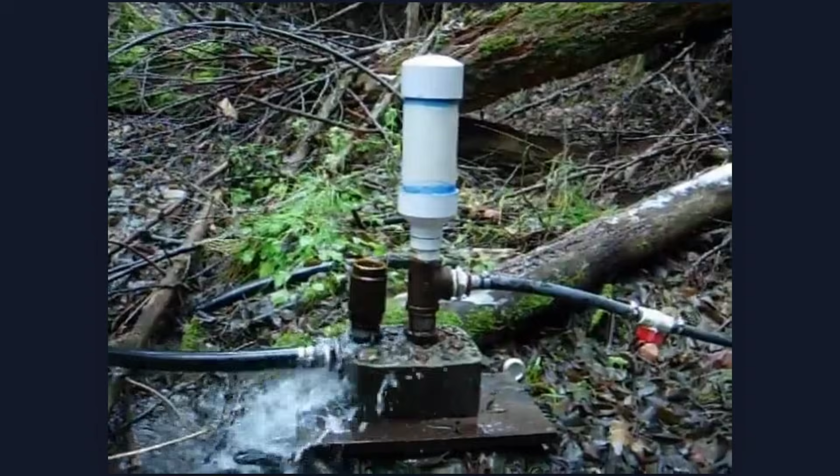250 years later, the device is still deployed. In the Philippines alone, more than 595 systems serve nearly 300,000 people daily. Researchers at Delft propose using it for energy recovery in modern water distribution. And yet, no American building code has ever created a pathway for it. No standard engineering specification lists it. The global pumps market runs on motors and electricity, and this machine asks for neither.

It is called a hydraulic ram pump. This is not a story about a machine that failed. This is a story about a machine that was standardized into invisibility.

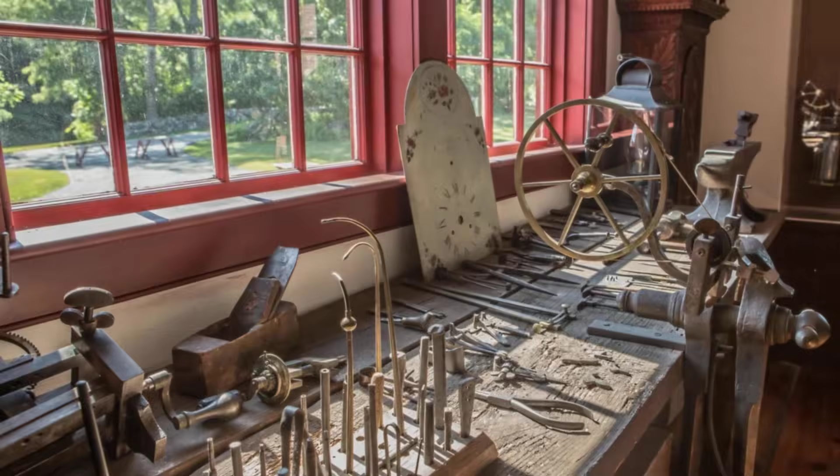Welcome to Forbidden Manual. The archive opens in 1775 in the pages of the Royal Society's Philosophical Transactions, the same journal that published Newton, Hooke, and Franklin. The paper is written by a clockmaker named John Whitehurst, and it describes something that should not work.

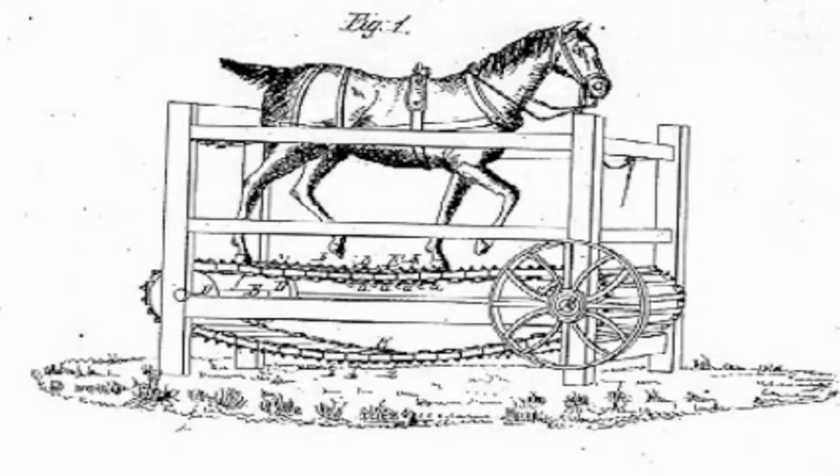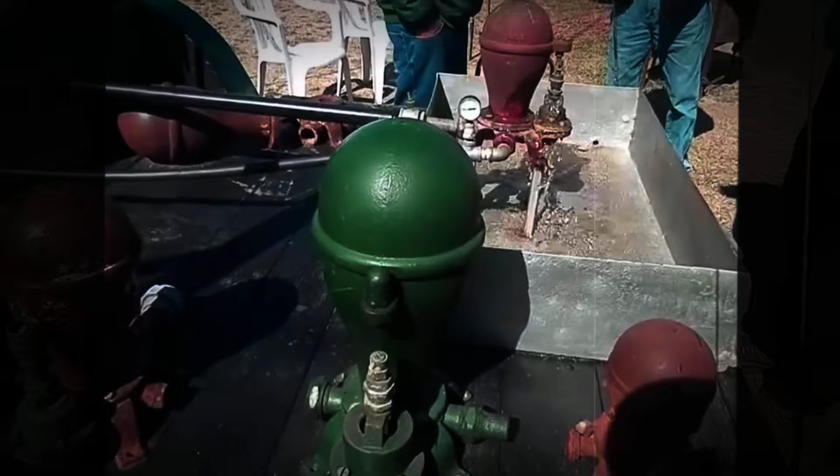3 years earlier, on the estate of Philip Egerton at Oulton in Cheshire, Whitehurst had built a machine. It raised water from a lower source to a higher destination, to the brew house and the estate offices, without a horse, without a windmill, without a steam engine. Whitehurst's explanation was precise. The water rose, he wrote, by its own momentum, not by external force, by momentum already present in the falling stream.

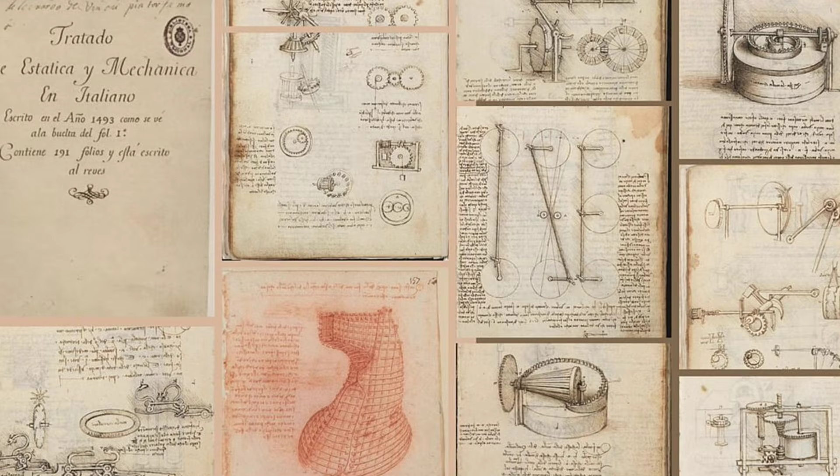The machine worked, it kept working, and in 1775, Whitehurst presented his findings to the most rigorous scientific body in the English-speaking world. This was not folklore. This was peer-reviewed physics 250 years ago.

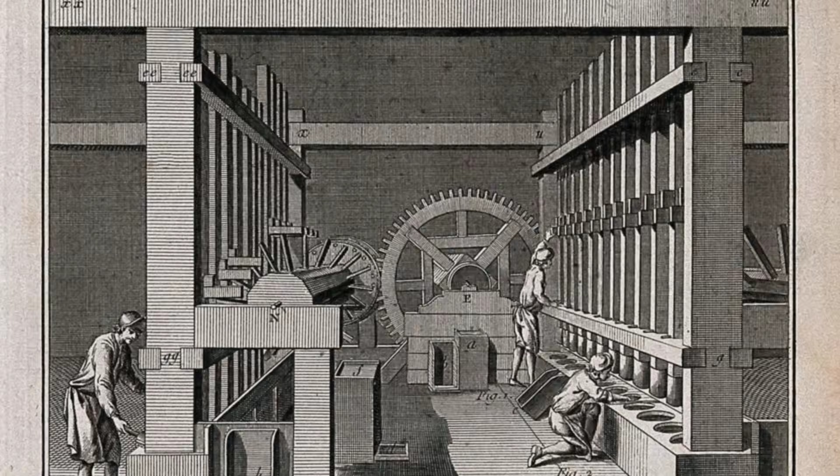In the town of Voiron in southeastern France, a paper mill owner faced a familiar problem. Water needed to reach a height the stream could not. The mill owner's name was Joseph Michel Montgolfier. You may know him for something else. 13 years earlier, he and his brother had launched the first successful hot air balloon. Now, Montgolfier turned his attention downward to falling water and the energy it carried.

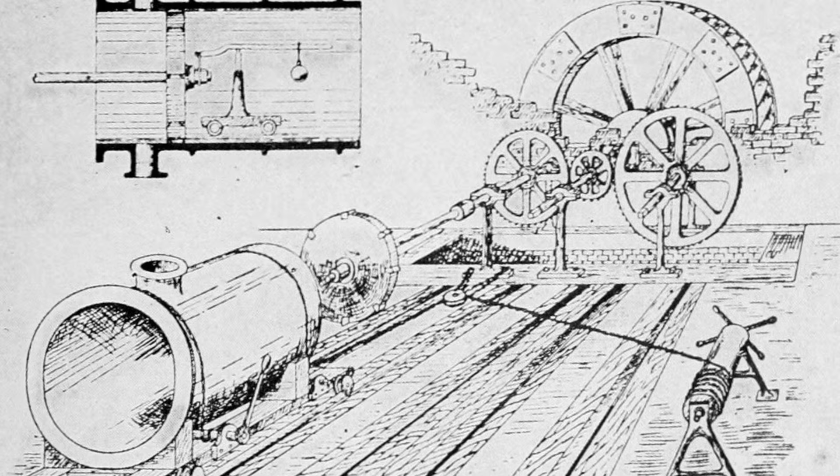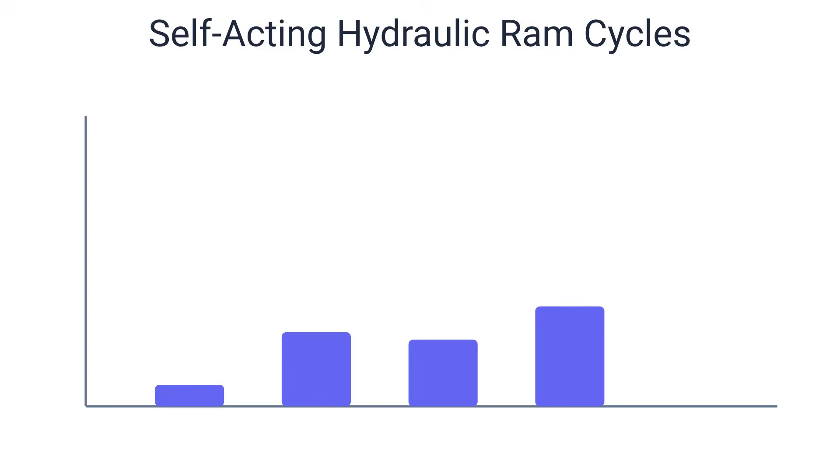He invented the self-acting hydraulic ram. The machine ran itself. No hand on the valve, no timing required. Water fell, pressure built, a valve slammed shut, and a smaller stream shot upward. The cycle repeated, 30 times a minute, 60, 100. The stream became the engine. No wire, no motor, no bill.

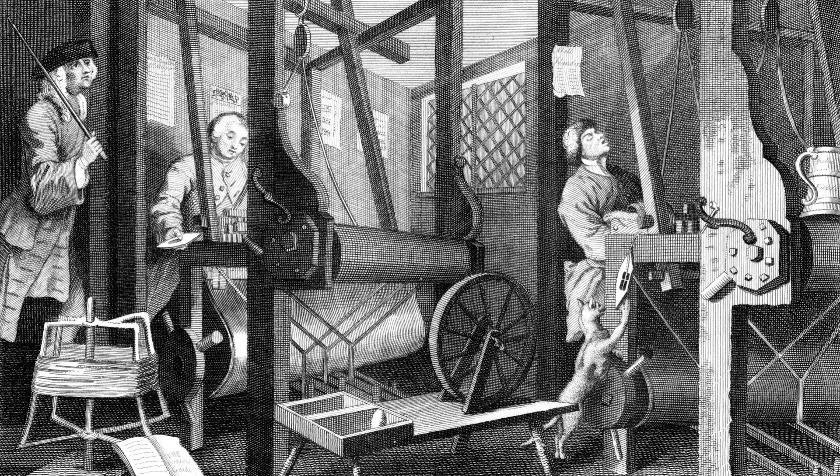Word traveled fast. By December of 1797, Matthew Boulton, one of the most powerful industrialists in Britain, partner to James Watt, builder of steam engines, had filed British patent 2207 on Montgolfier's behalf for an apparatus for raising water and other fluids. Consider the irony. One of the fathers of industrial machinery helped formalize a device whose greatest selling point was that it required no industrial inputs at all. And then the machine crossed the Atlantic.

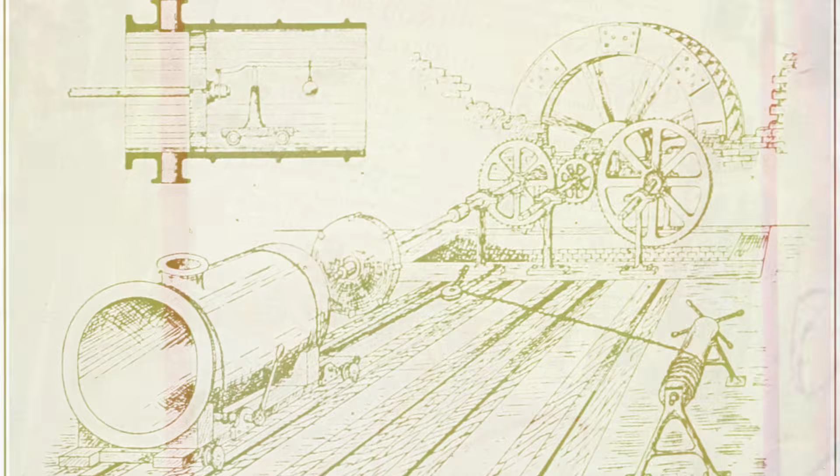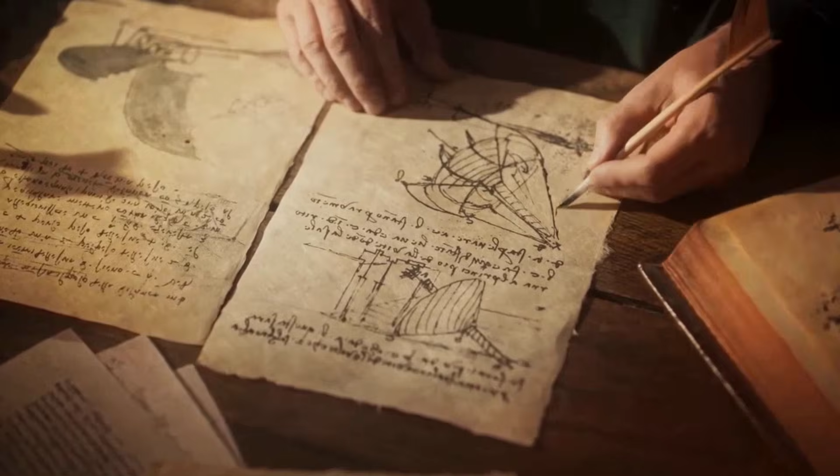In 1798, the Portsmouth Aqueduct in New Hampshire installed a hydraulic ram. The local description was not modest. They called it the perpetual pump, capable of lifting a barrel of water every minute. Perpetual. That was the word they chose, not perpetual motion. Engineers in 1798 knew better than to claim that. Perpetual operation, a machine that ran without rest, without fuel, without human labor, as long as the stream kept flowing. The valve slams shut. Pressure explodes, water climbs.

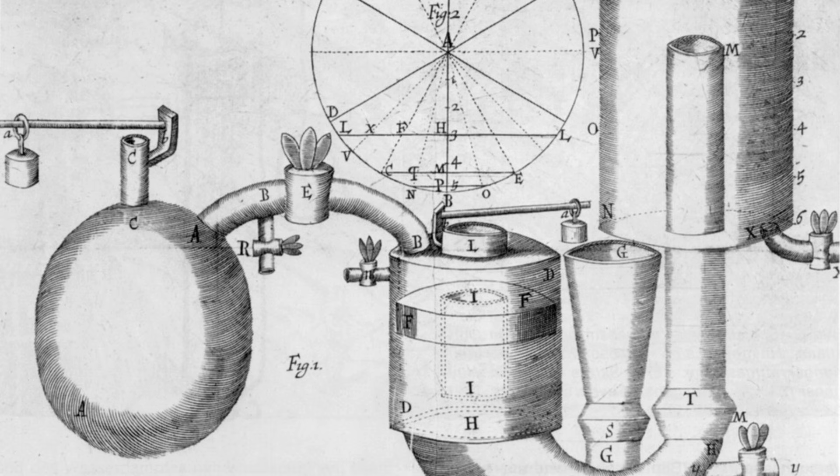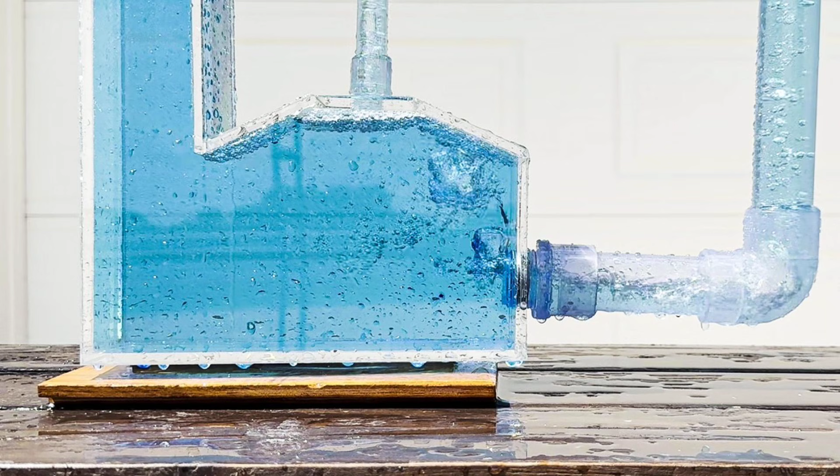By the end of the 18th century, the hydraulic ram had earned a British patent, a Royal Society publication, and an American installation that called it perpetual without embarrassment. The physics was proven, the elegance was undeniable, more than 2 centuries old, still working today. What happened next was not a failure of engineering.

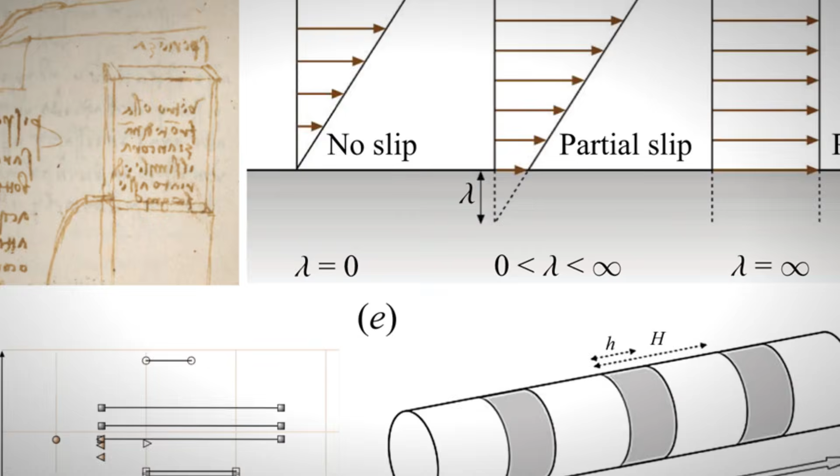In 1975, an engineer named H.W. Iverson published a paper in the Journal of Fluids Engineering, the flagship publication of the American Society of Mechanical Engineers. The paper was titled An Analysis of the Hydraulic Ram. By then, the device was nearly 200 years old, and engineers were still writing peer-reviewed analyses of how to optimize it. Iverson was not alone.

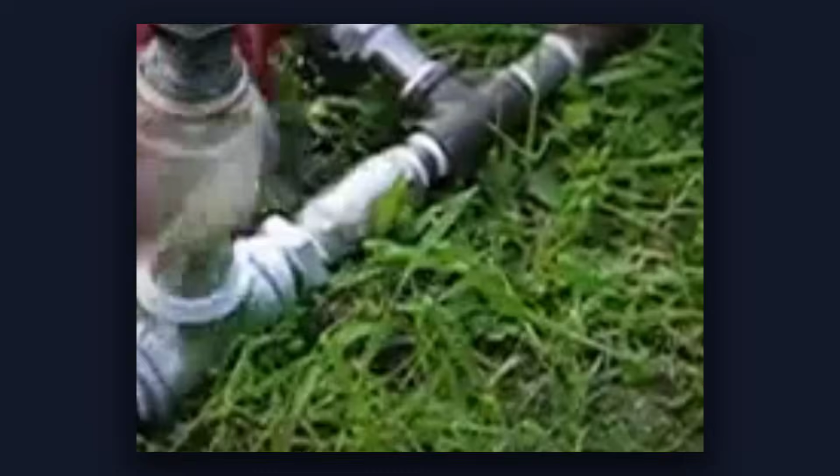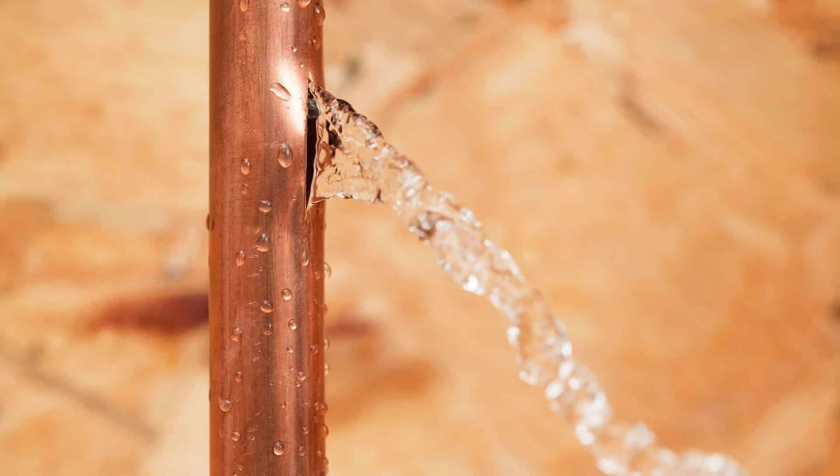In 2018, Chin Han Chuan at Universiti Sains Malaysia ran experiments varying supply head, delivery head, and air vessel geometry. The same year, Nikita Mishra and colleagues published data showing that impulse valve beat frequency, the rhythm of the machine, could shift efficiency dramatically. Increasing beat frequency from 65 to 76 cycles per minute changed everything. More water wasted, less water delivered. The machine looks crude. It is exquisitely sensitive.

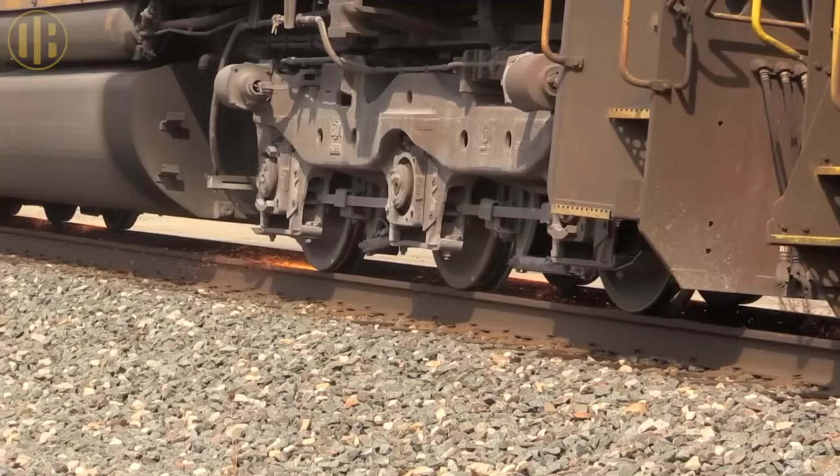So how does it work? Think of a freight train. A loaded freight train moving at speed carries enormous momentum. The faster it moves, the harder it is to stop.

And if you stop it suddenly, if you throw a barrier across the tracks, the energy does not vanish. It transfers. It crashes. A hydraulic ram harnesses that crash. Here is what happens in real time.

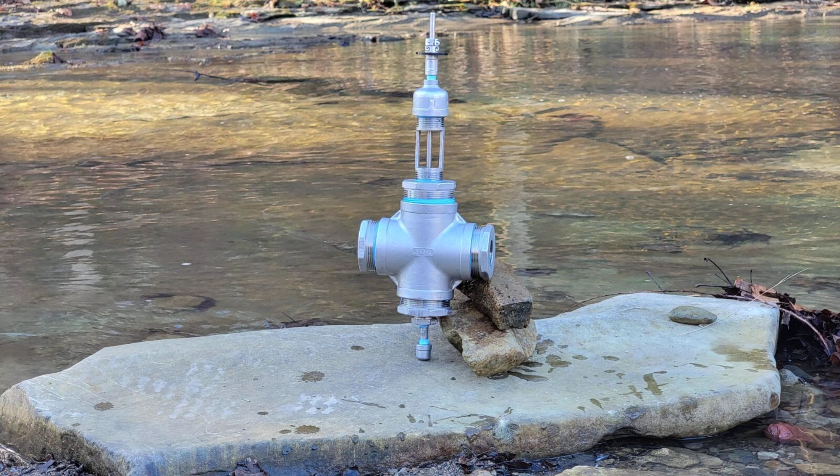A rigid pipe, the drive pipe, fills with moving water from a stream or spring. The water accelerates downhill. At the bottom, an impulse valve sits open, letting water spill freely. The flow builds speed. The instant the flow reaches a critical velocity, the valve slams shut. The moving column has nowhere to go.

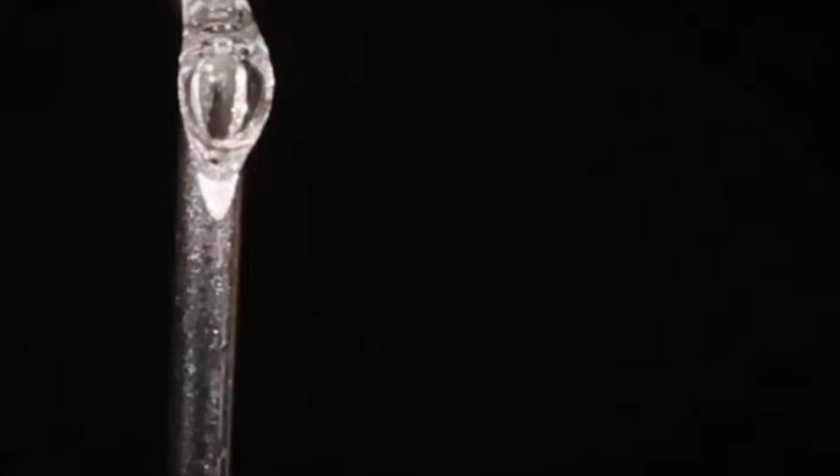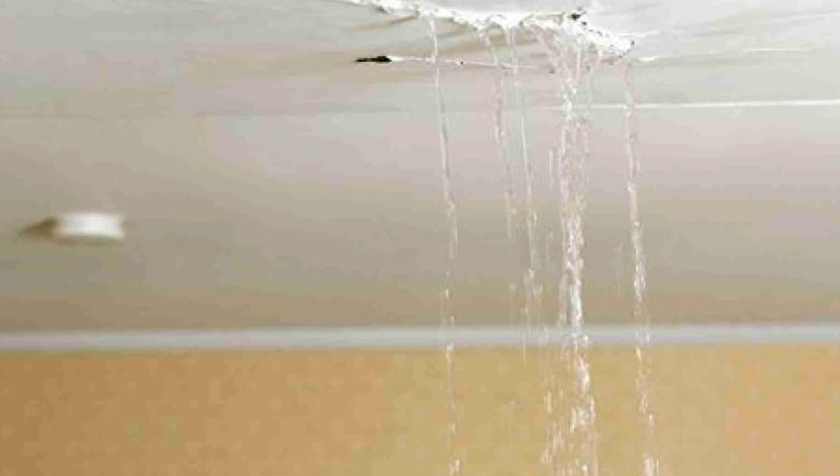Water is nearly incompressible. The momentum of that column converts instantly into a pressure spike, a shock wave called water hammer. The same phenomenon that makes pipes bang in old buildings. The same physics that can rupture poorly designed plumbing. But in the ram pump, that shock wave has a destination.

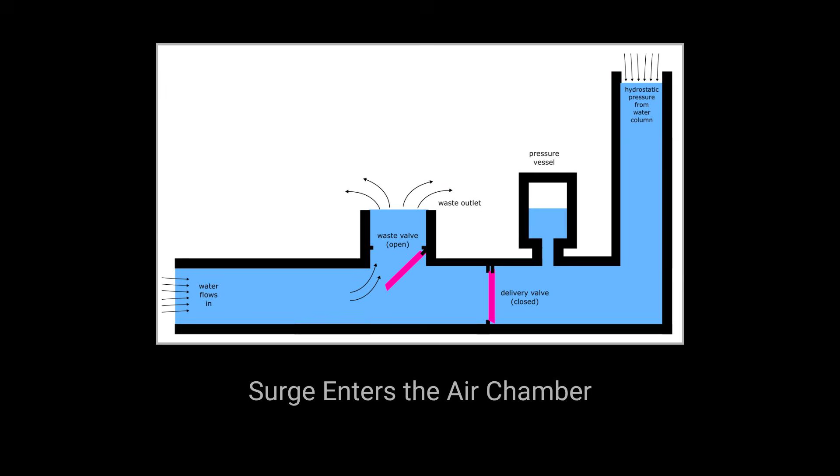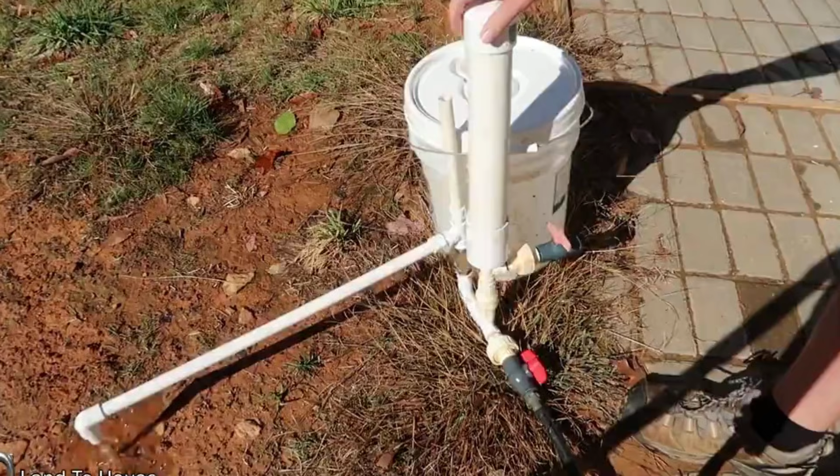The pressure spike forces open a second valve, the delivery check valve, and pushes a small volume of water into an air chamber. The air compresses, absorbs the shock, and then pushes that water up the delivery pipe, uphill, higher than it fell. The impulse valve falls open again. The cycle restarts, 30 to 100 times per minute. No switch, no motor, no external input. 2 moving parts, that is all.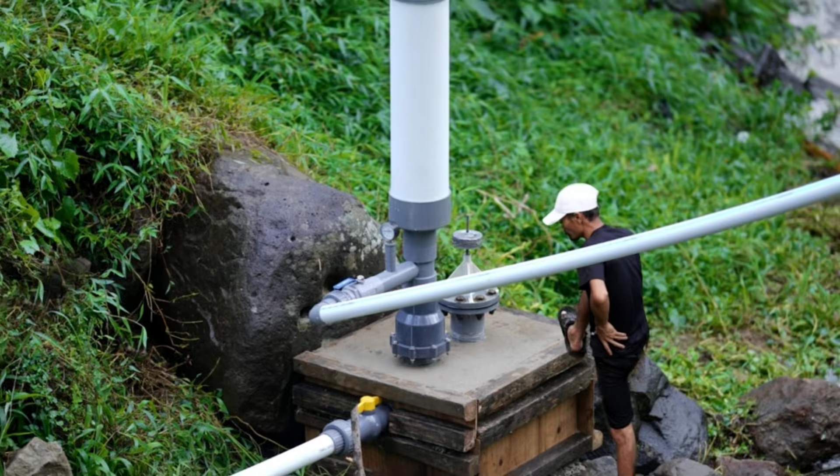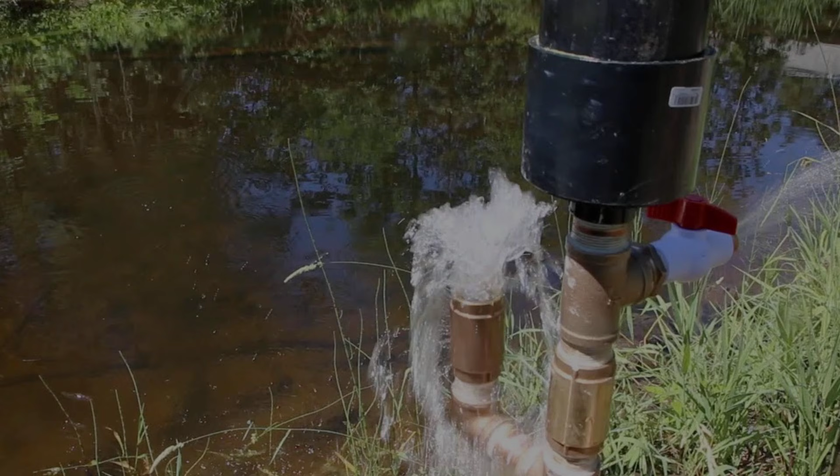The numbers seem impossible. Practical Action, a British engineering charity with decades of field experience, reports that under favorable conditions, more than 50% of the energy in the driving flow can be transferred to the delivery flow. Not 50% of the water. Most of the water spills out the waste valve. 50% of the energy. The machine sacrifices volume to gain height. A larger flow falling through a small drop lifts a smaller flow through a much larger rise.

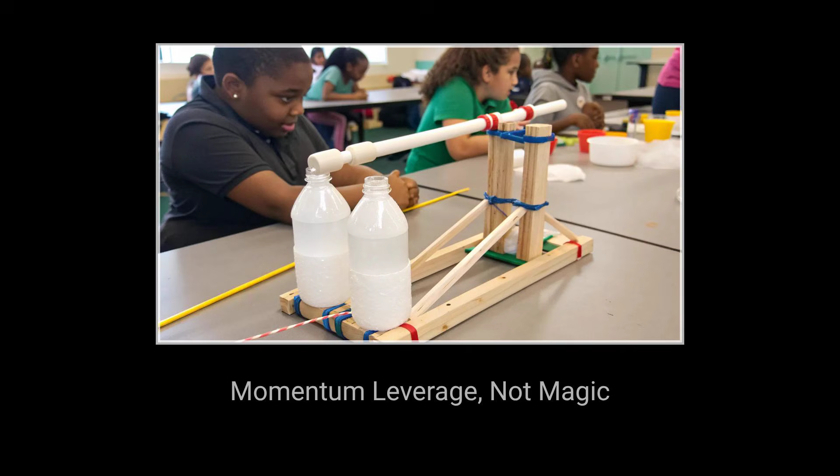The physics is not magic, it is leverage. It is momentum, redirected. The stream is the engine, the crash is the mechanism, the air chamber is the cushion, and the delivery pipe carries water uphill, without electricity, without fuel, without a monthly invoice, as long as the source keeps flowing. A pump that needs no power, a system that creates no bill, engineering that asks for nothing except falling water and patience. That was its triumph, and that was its problem.

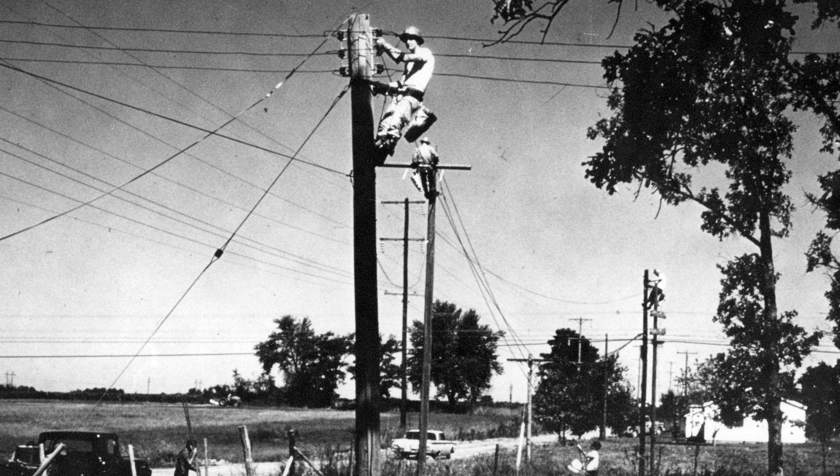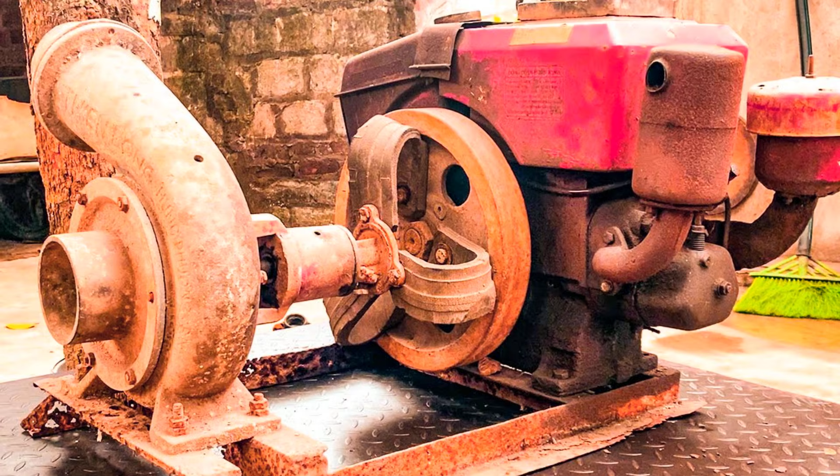When electricity reached the American farm, everything changed. The Smithsonian documents rural electrification as one of the most transformative shifts in agricultural history. Electric power brought light to farmhouses that had known only kerosene. It brought refrigeration to dairies that had relied on ice cellars. And it brought a new kind of pump, motorized, controllable, instant.

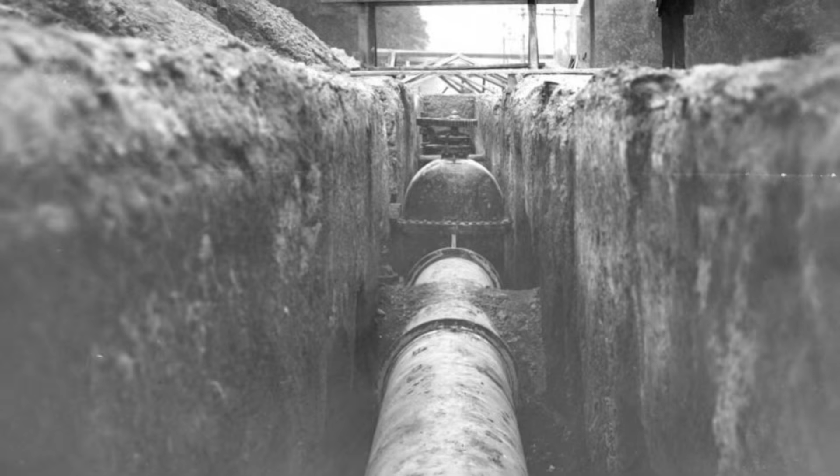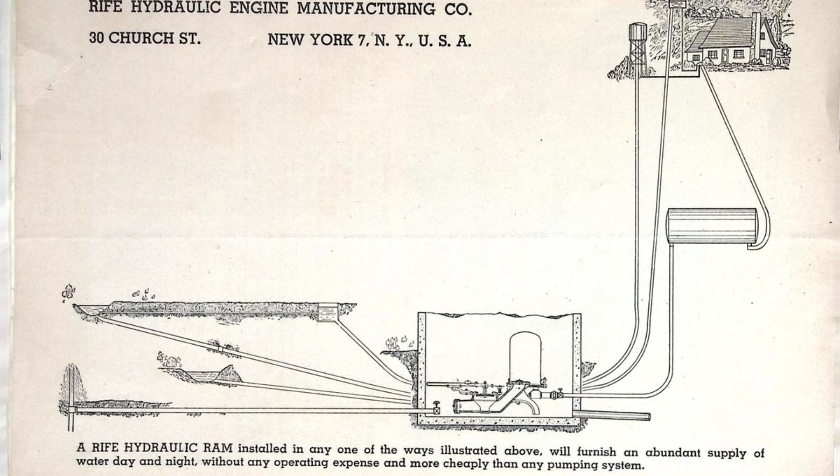The electric pump had a plug. It had a breaker, it had a bill. It fit into a system that could be metered, serviced, and sold. The hydraulic ram had none of these. It asked for nothing. It generated no recurring revenue. It required no technician, no replacement parts, no annual inspection. Once installed, it simply ran on physics that predated the grid and would outlast it. That made it invisible to the infrastructure being built.

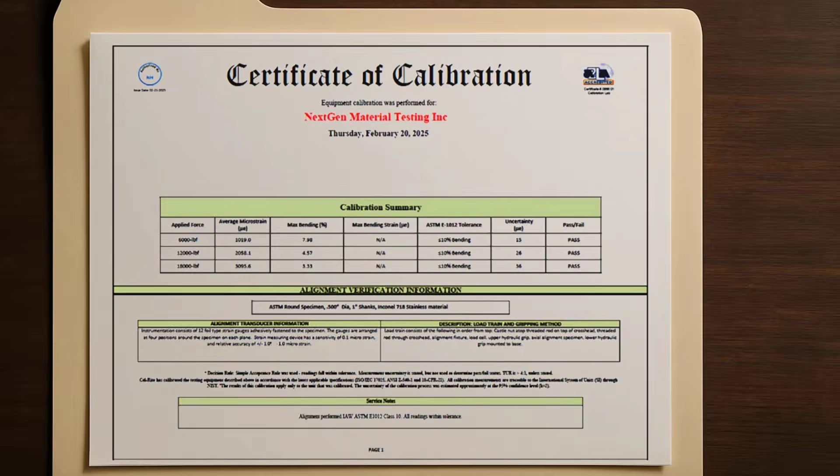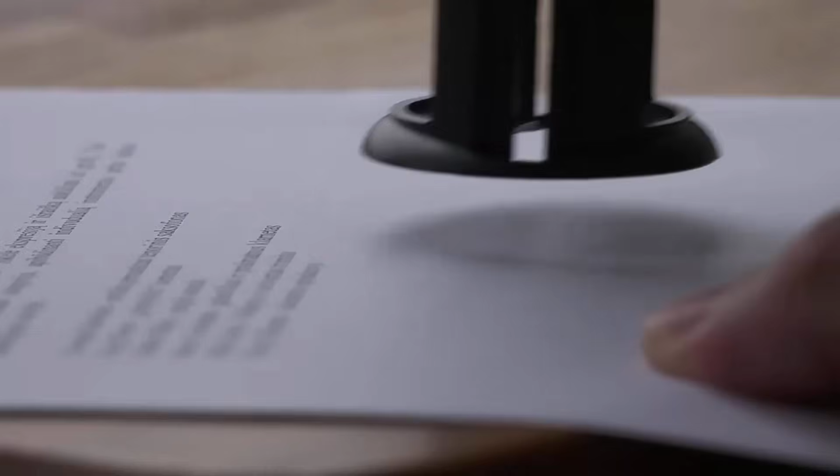Today, according to industry estimates from Mordor Intelligence, electric motor-driven pumps account for approximately 75% of the global pumps market. The hydraulic ram does not appear in procurement catalogs. It does not appear on standard bid sheets. It does not appear in the engineering specifications that contractors pull from software libraries. It is not banned, it is simply not listed. But the absence goes deeper than catalogs.

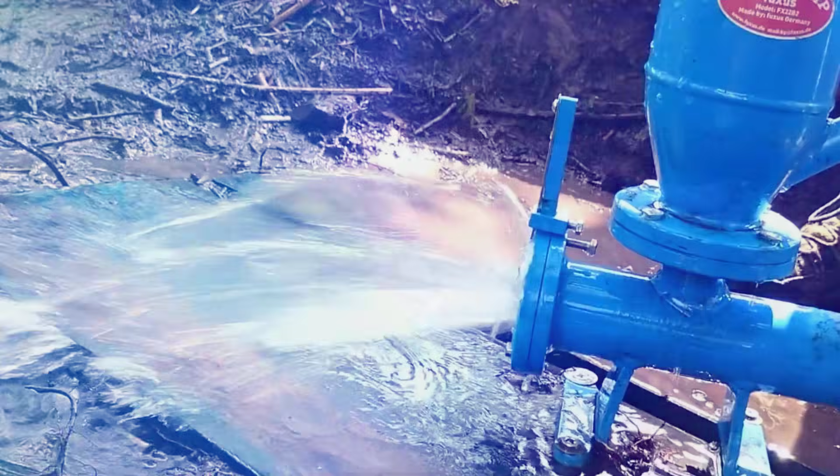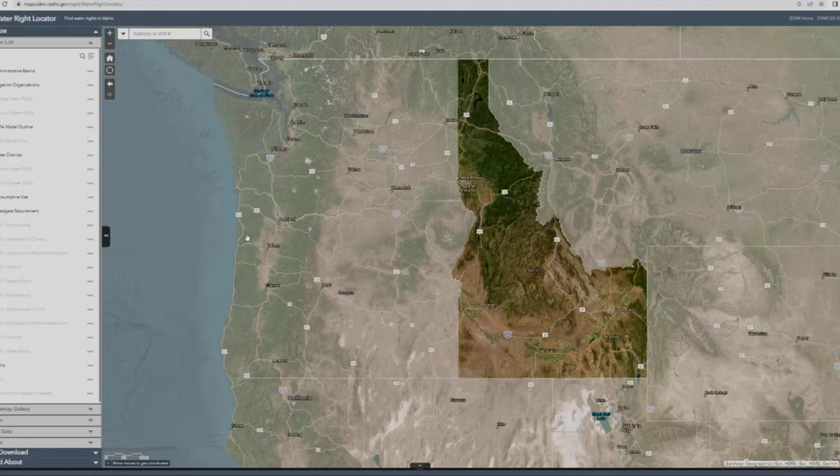If you find a spring on your property, a spring that flows year-round, that drops 12 feet to your garden, you might read about the hydraulic ram. 2 moving parts, no electricity, runs indefinitely. You might think, this is the answer. Then you call the county. The first question, do you have a water right? California's State Water Board is explicit. You should not assume that an existing diversion pipe or facility gives you a legal right to divert. Post-1914 appropriative diversions generally require permitting and licensing.

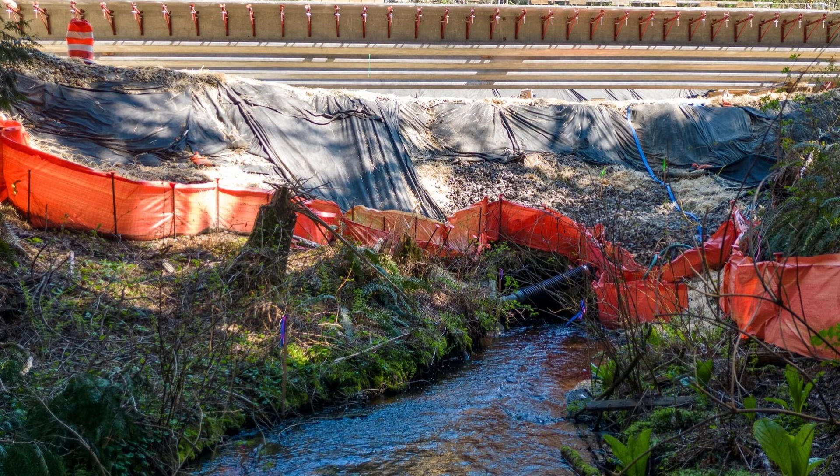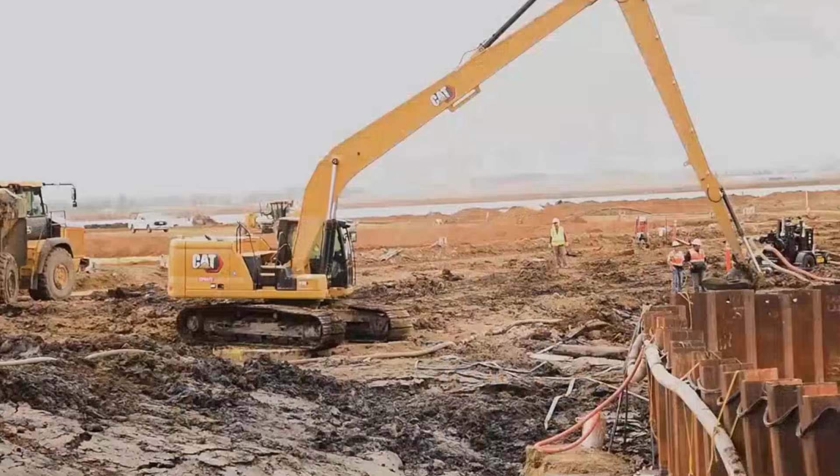The second question, does your diversion require a hydraulic project permit? Washington's Code WAC 220-660-010 states that anyone who wants to use, divert, obstruct, or change the natural flow or bed of fresh or salt waters generally needs a hydraulic project approval. The third question, are you connecting this to potable plumbing? Washington's Plumbing Code WAC 51-56-0600 requires backflow protection for potable supplies serving irrigation systems. Annual testing, approved assemblies. The fourth question, who is your licensed installer? The spring has not changed, the physics has not changed, only the paperwork has.

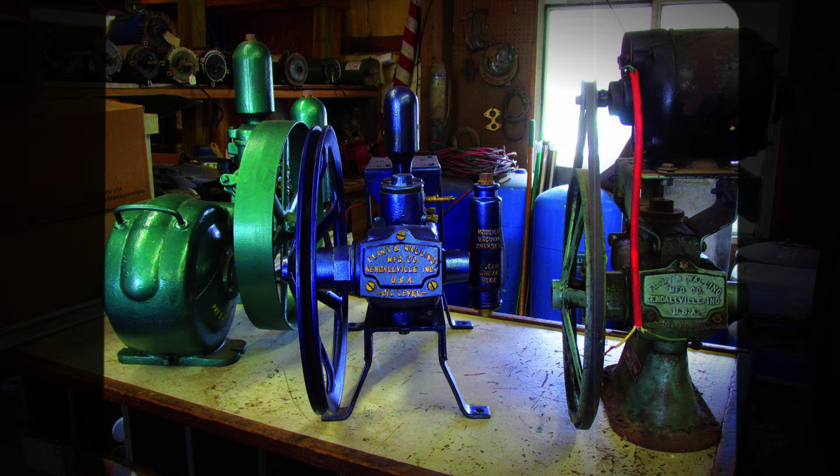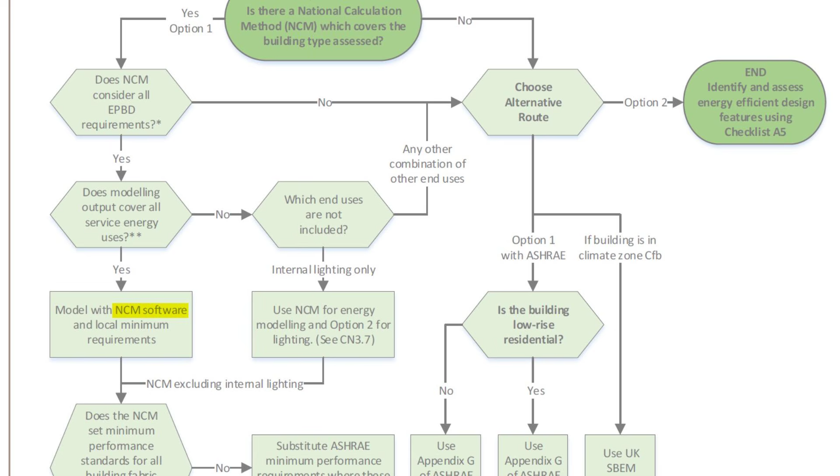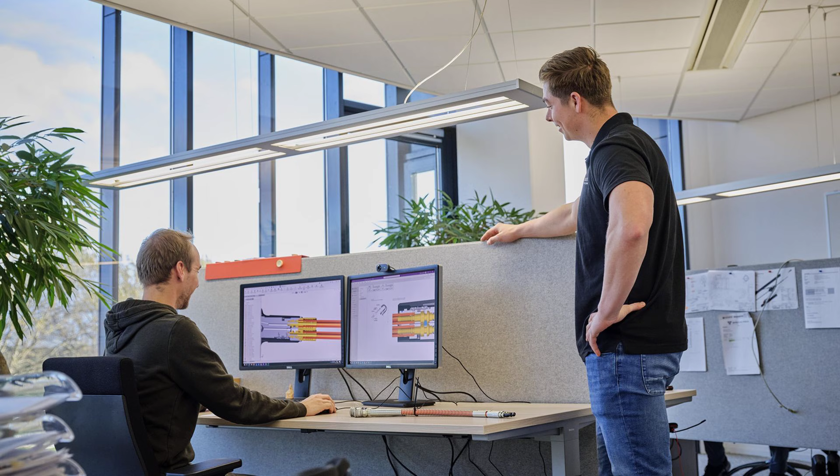They electrified the farm and made the motor pump the default answer. They wrote rules for cross connections, potable protection, and permitted diversions, rules that assume equipment with serial numbers and power inputs. They subsidized electric infrastructure and made the motor pump easy to finance, easy to permit, easy to specify on a bid sheet. They built a procurement system that cannot see a machine with no manufacturer's warranty and no wiring diagram. They created licensing structures with no category for a device that has two moving parts and no electricity. They did not need to ban the hydraulic ram. They only needed to make the conventional path easier.

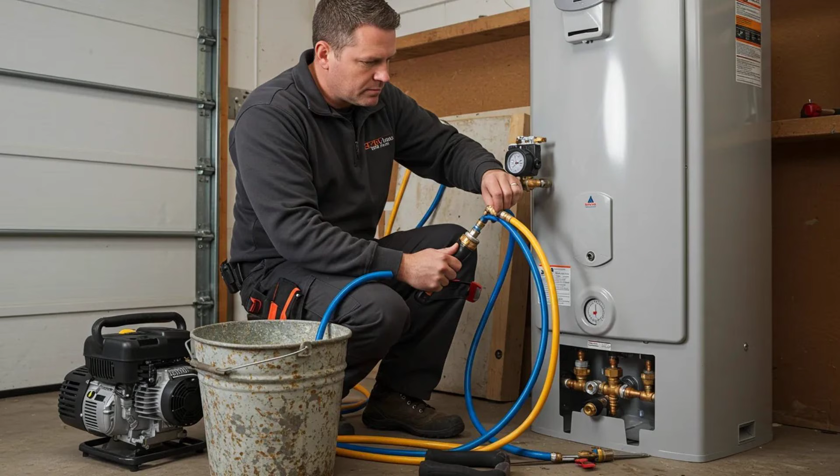No regulator sits in an office scheming to suppress the ram pump. The conspiracy theory is the wrong frame. The truth is structural. The codes, the permits, the appraisal categories, the bid specifications, they were all designed around equipment that plugs in, equipment that can be inspected, equipment that fits a category. The hydraulic ram fits no category. And what fits no category finds no pathway.

You cannot meter the stream. You cannot sell the shockwave. You cannot build a subscription around physics that asks for nothing. The machine solved the wrong business problem. It works where there is flowing water, a drop, and patience. It does not create dependency. It does not generate demand. That is not conspiracy. That is economics. And economics writes the codes, but the machine never disappeared. It simply moved to places where the grid could not follow.

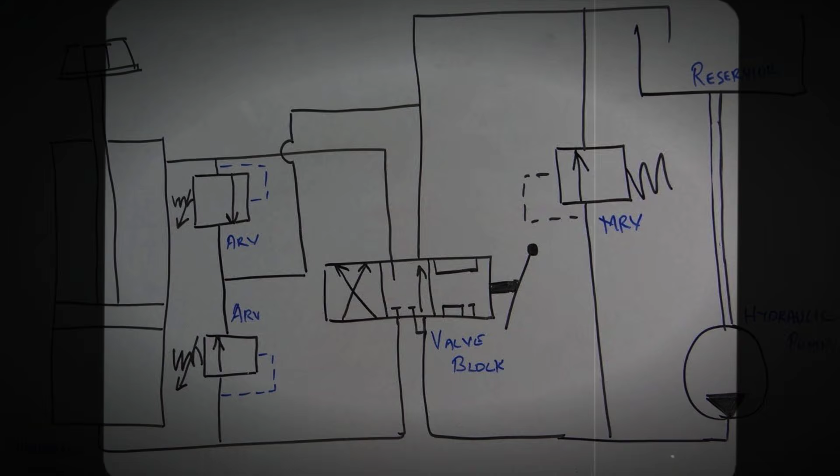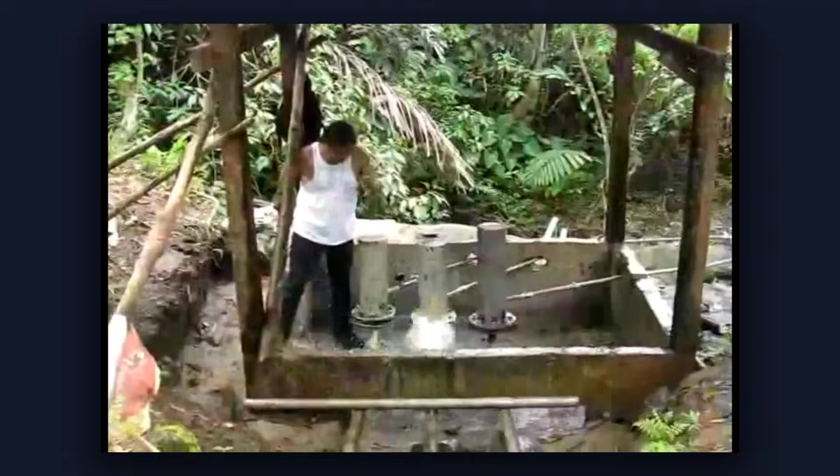In the Philippines, an organization called AIDFI, the AID Foundation Incorporated, describes the hydraulic ram as a forgotten technology that it recovered and improved starting in the 1980s. AIDFI's technicians travel to mountain villages where no power line has ever reached. They install steel-bodied ram pumps fed by streams and springs. The machines start beating, water climbs.

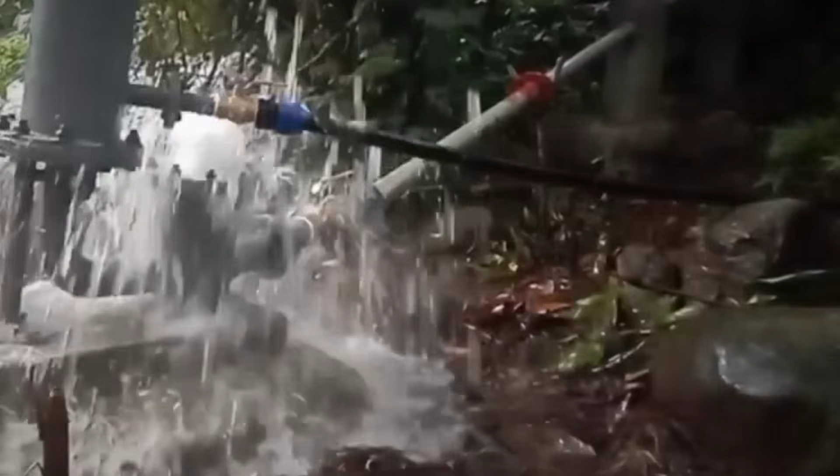The numbers are not small. AIDFI's current program reports more than 595 systems installed, more than 295,000 people served daily. Technology transferred to Afghanistan, Nepal, Colombia, Mexico. Lifts as high as 240 meters achieved. No wire has ever been run to these sites. None is needed. The ram returns, not as museum piece, but as infrastructure.

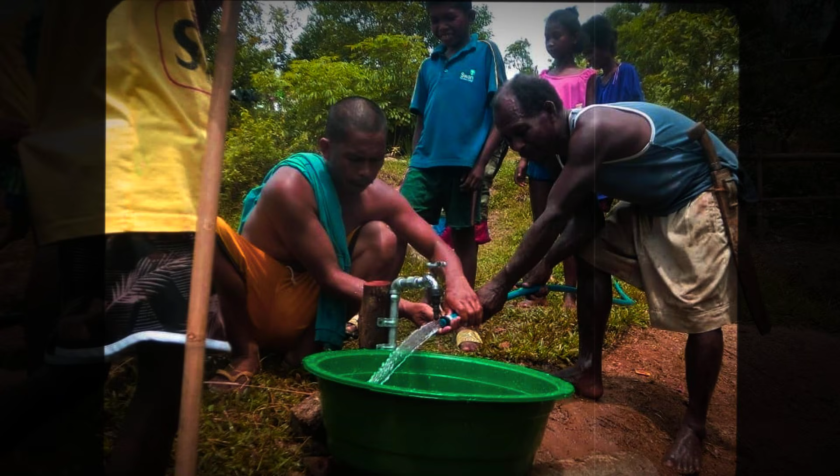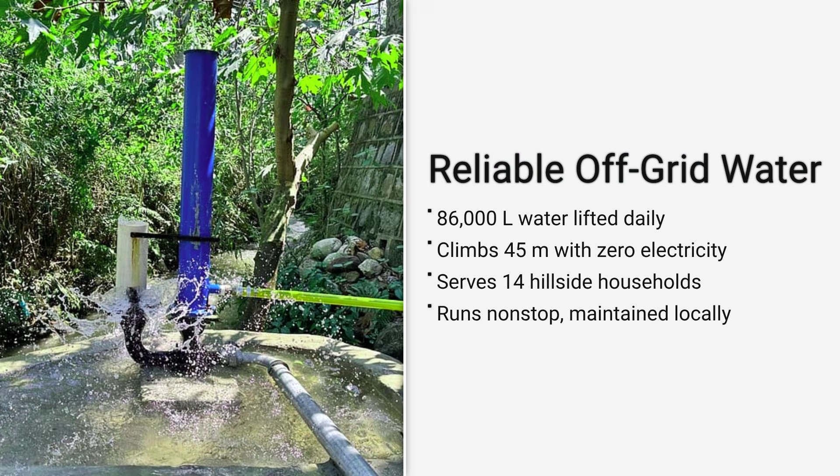In Moralibanjang, a village in the Nepali hills, a hydraulic ram pump was installed in 2011 by Renewable World, an international development organization. The documented results: 86,000 liters per day pumped 45 meters uphill, 14 households served. Downstream improvements in irrigation and nutrition measured and recorded. The machine has no plug, it has no bill, it has no expiration date. 14 families, one pump. Beating since 2011, and the technology is not standing still.

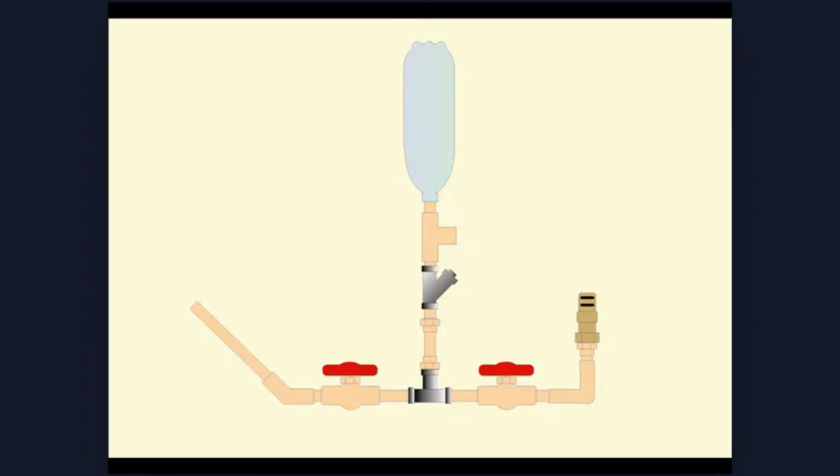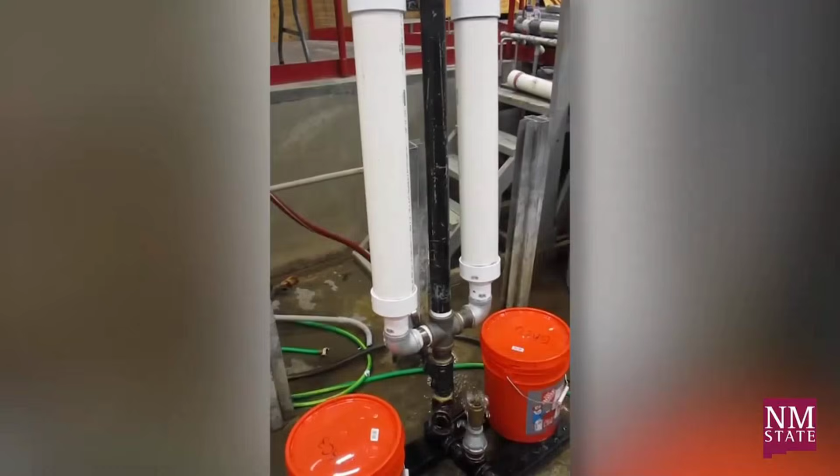In 2022, researchers at IHE Delft Institute for Water Education, Maria Salinas Rodriguez, Kennedy, and David Ferràs, published a paper proposing something unexpected. They argued that hydraulic ram logic could be used for energy recovery inside modern water distribution systems. Excess pressure that is currently wasted across pressure-reducing valves could instead pump water to elevated storage. The ram pump returns not as nostalgia, it returns as engineering.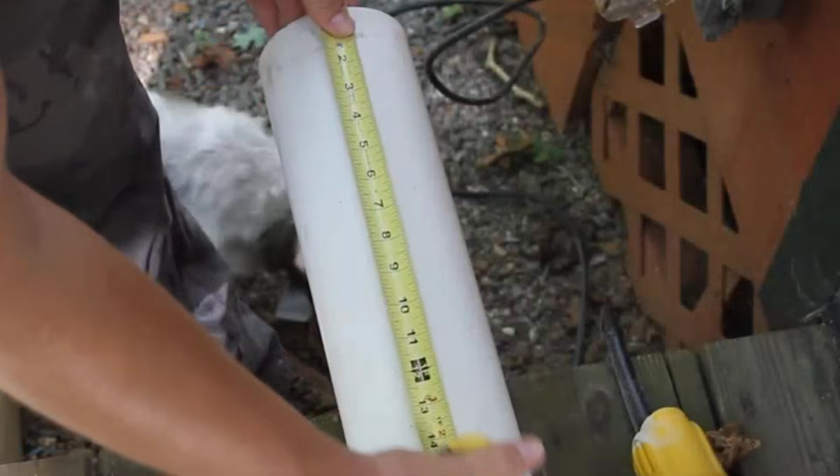For the homesteader, the numbers are within reach. Clemson University's land-grant press publishes an extension guide for homemade PVC ram pumps. Estimated cost for a simple build, $150 to $200, depending on location and pump size. Build It Solar documents a 1 1/4 inch fitting setup for approximately $120. $150 in PVC fittings, a rigid drive pipe, an air chamber, 2 valves. That is the bill of materials for a pump that runs without electricity, without fuel, without a monthly invoice. The machine is not free, but it is close, and it never asks again.

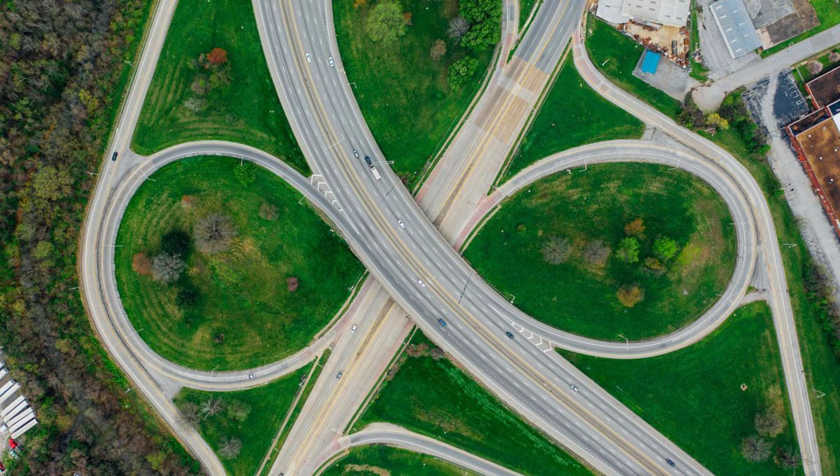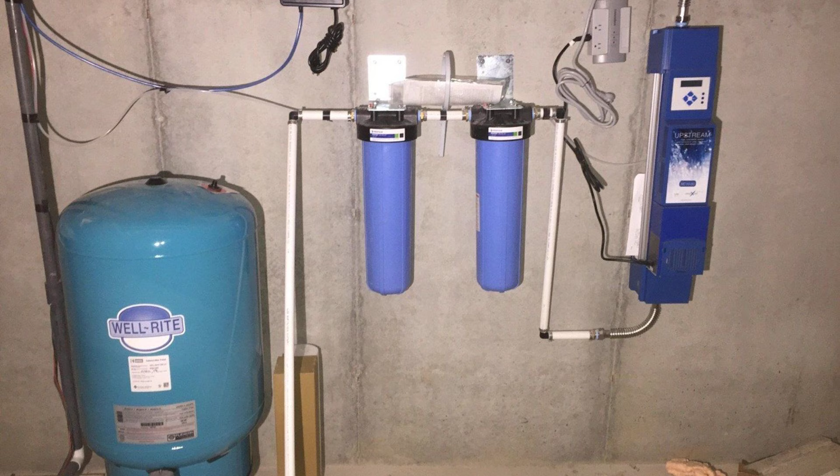This is the pattern. Earth tubes were sidelined by moisture concerns and indoor air quality codes. Site-specific systems lost to standardized HVAC packages. Passive solar direct gain design works beautifully when done well, but appraisal structures and production building norms favor mechanical conditioning. Rainwater harvesting is technically straightforward, but the moment the tank touches modern plumbing, cross-connection codes, treatment requirements, and backflow rules multiply the paperwork. Gravity-fed spring systems still serve remote communities around the world, but potable water regulations complicate any attempt to adopt them inside code jurisdictions.

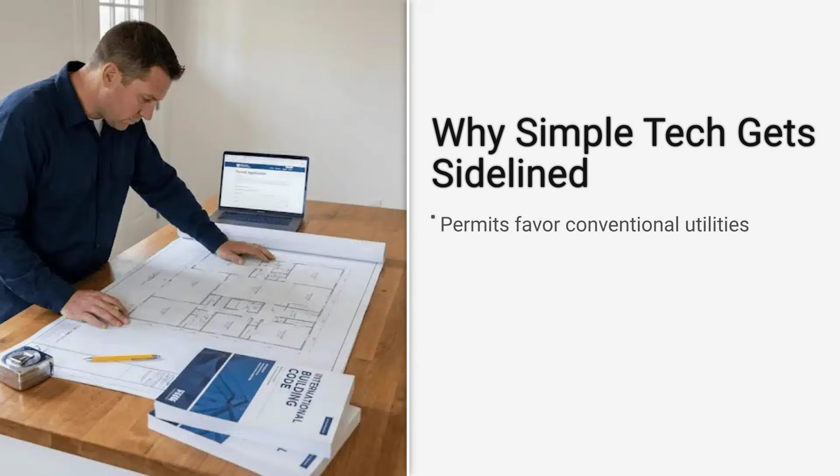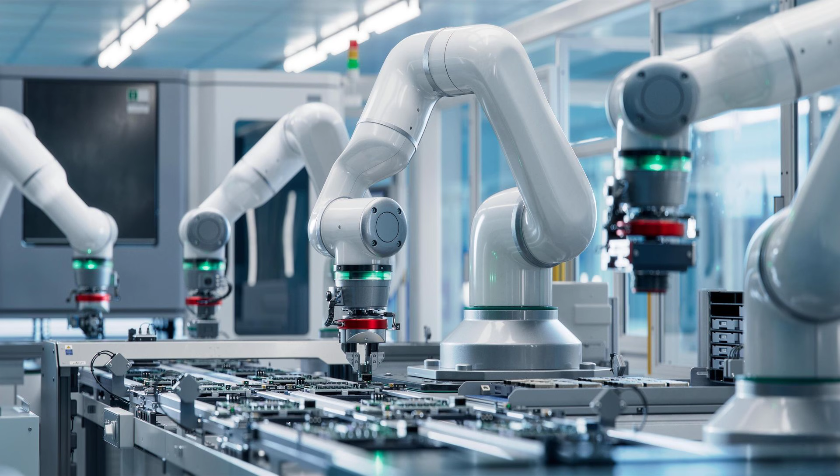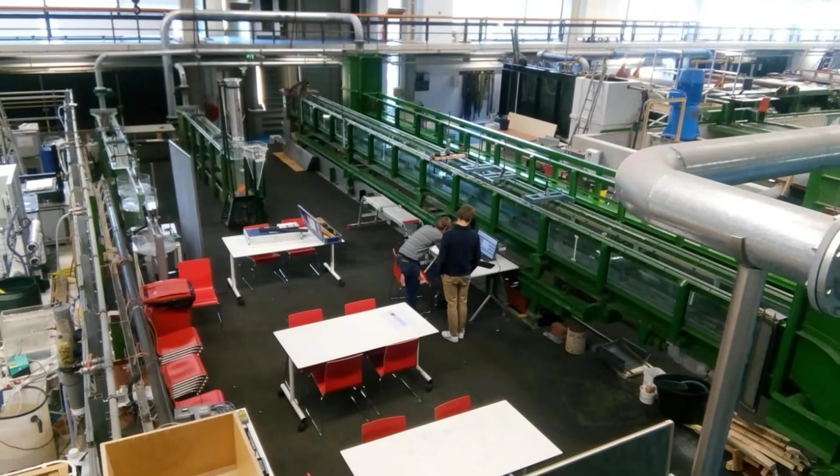The pattern repeats. Building methods that eliminate bills are systematically harder to permit, harder to finance, harder to specify. Not banned, just absent; not illegal, just uncategorized. The system does not need to conspire, it only needs to make the conventional path easier. They will not tell you that a machine with 2 moving parts has been pumping water uphill since 1772. They will not tell you that nearly 300,000 people in the Philippines drink from hydraulic ram systems every single day. They will not tell you that researchers at Delft are now proposing ram pump logic for modern municipal water systems, not as a relic, but as a recovery tool.

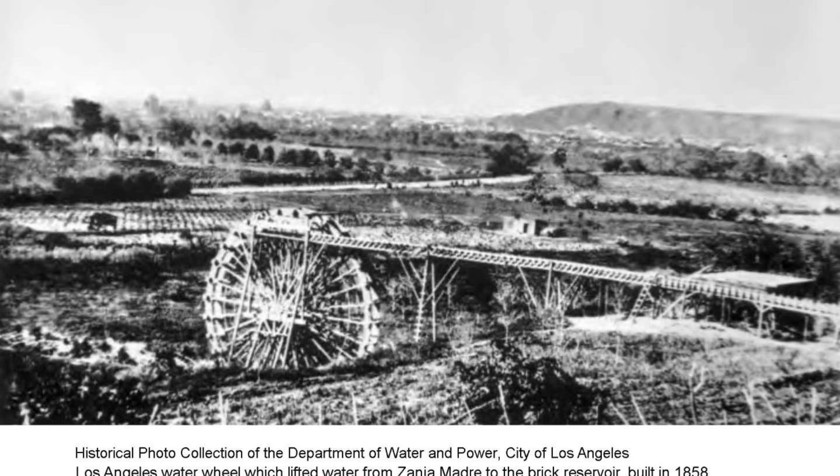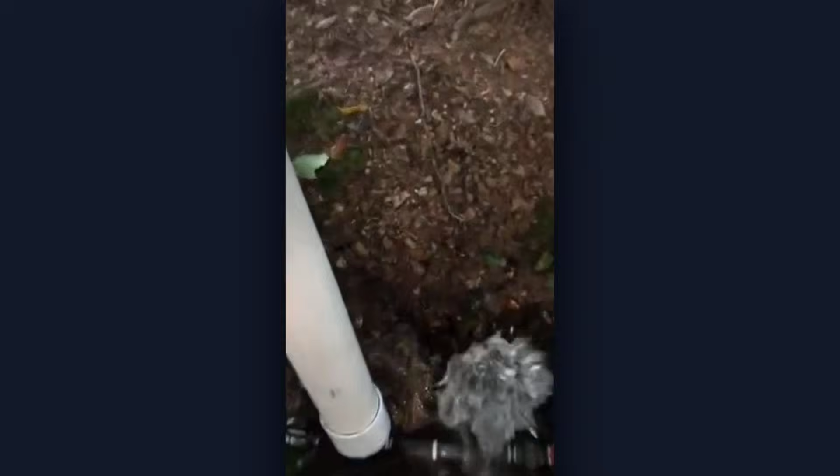They will not tell you that the stream on your property has been holding kinetic energy since before your house was built. 250 years ago, John Whitehurst wrote to the Royal Society about a machine that raised water by its own momentum. The machine still works, the physics has not changed. The momentum is still there, in every stream, every spring, every drop of falling water that moves downhill and could be asked to lift something up. The hydraulic ram does not advertise. It does not require subscription. It does not send a monthly statement. It does not need a firmware update or a service contract or a licensed technician.

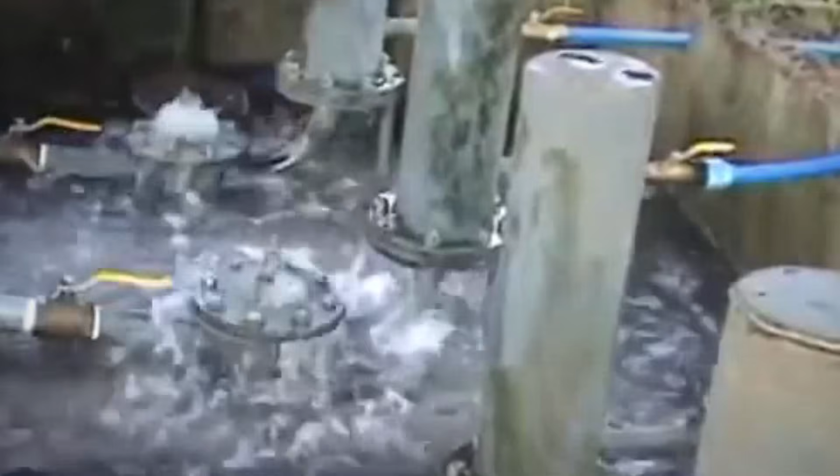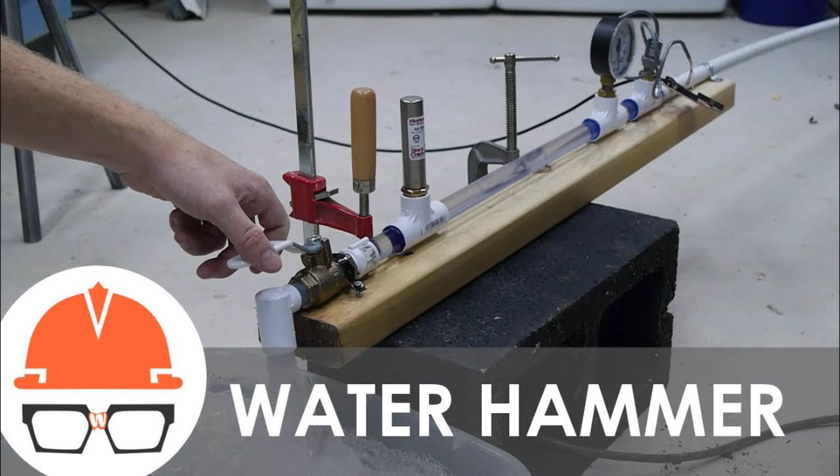It simply waits in the physics of moving water, in the patience of a valve, in the compression of air inside a chamber, in the shock wave that repeats 30 times a minute, 60 times, 100, as long as the stream keeps flowing. The stream is the engine. The crash is the mechanism. The silence between beats is the only maintenance it asks. A pump that runs without power, a system that asks for nothing, engineering that predates the grid and will outlast it.

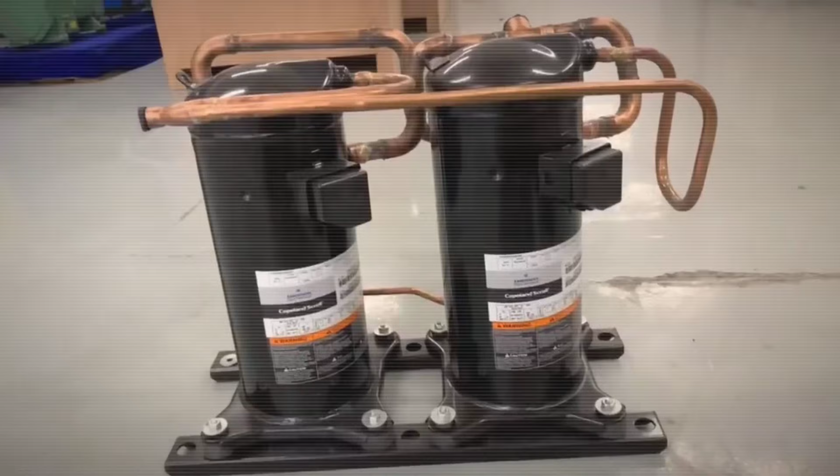Next time on Forbidden Manual, a cooling system that runs on water and gravity alone. No compressor, no refrigerant, no electricity. The physics has been documented for over a century. The code has never mentioned it. The archive opens in 1904 on the rooftop of a Chicago meatpacking plant, where engineers discovered that the night sky itself could be a refrigerator.